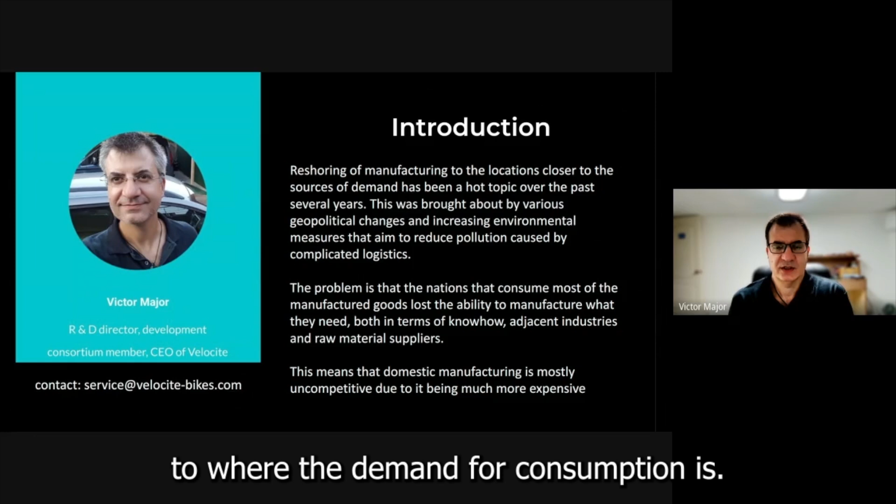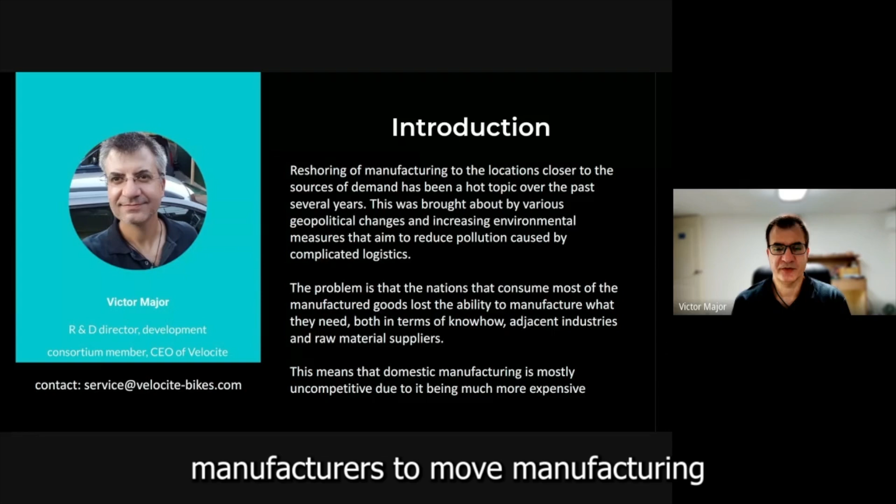I will talk about what's known as reshoring. Reshoring means moving production back to where the demand for consumption is. Offshore production became a popular solution to increase profitability by brand owners because of labor costs that were rising as the prosperity of the local population rose. Changes in geopolitics allowed manufacturers to move manufacturing to countries that were less economically developed, and therefore the salaries were lower, ensuring profitability or sometimes even survival of manufacturing companies.

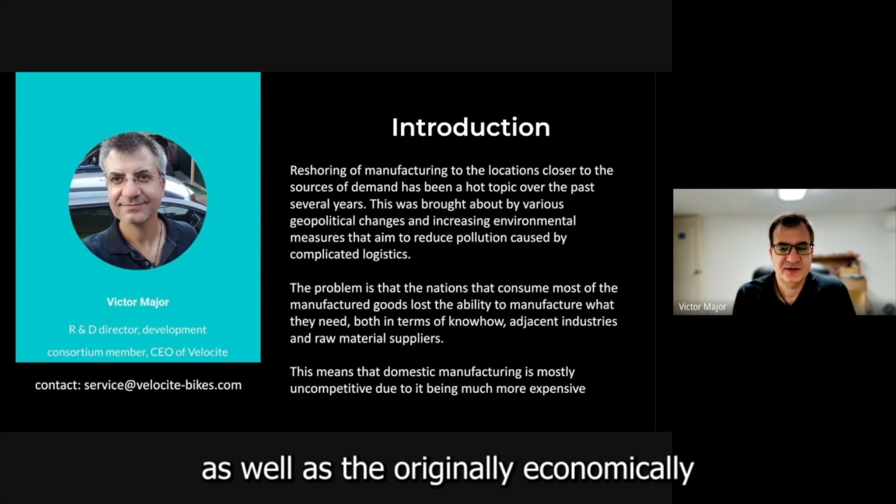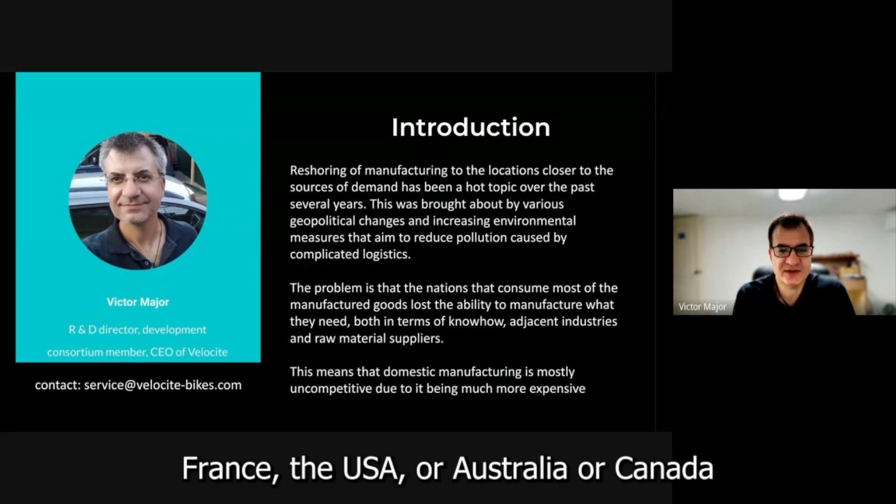However, due to changes in geopolitics, as well as the originally economically underdeveloped countries becoming more developed and therefore labor costs increasing, brands have increasingly been looking to return manufacturing back home, be it Germany, France, USA, Australia or Canada. Bicycle manufacturers specifically, because that's my specialty, have been trying to move as much manufacturing back to home markets as possible. However, that sounds nice in theory.

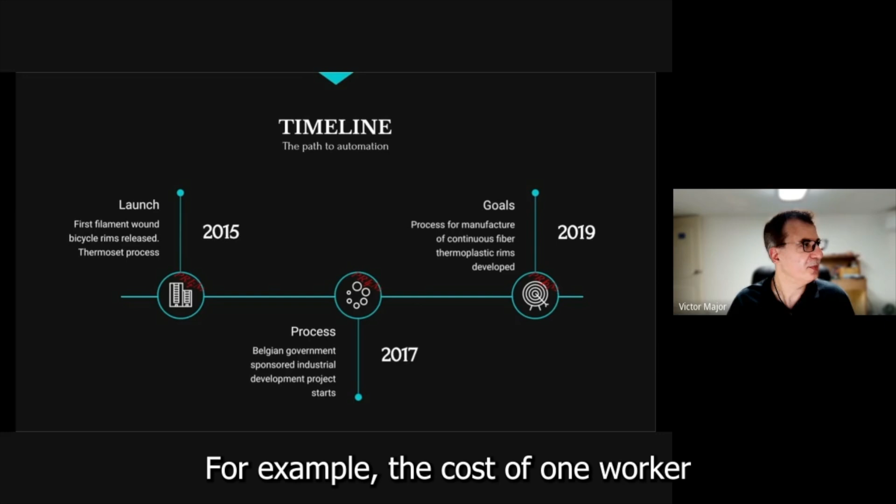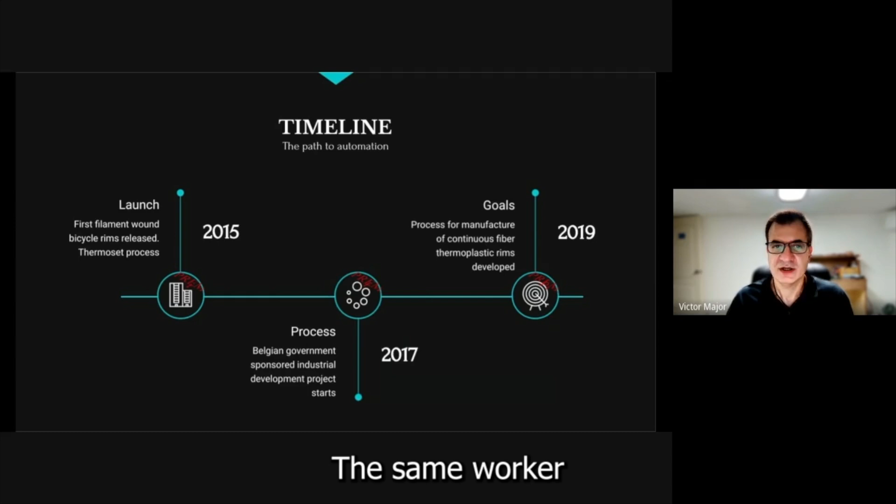In practice, it's proven very difficult. Let me bring up a slide so I can give you exact information. Even though the cost of labor has increased in developing economies, it is still roughly 3 times lower than in developed economies. For example, the cost of one worker per hour in Germany is $26. The same worker we are currently paying in China $7.70. And in one of the cheapest possible places in Europe, if you want to manufacture in Europe, we would have to pay $15 for labor in Czech Republic, roughly double the cost compared to China.

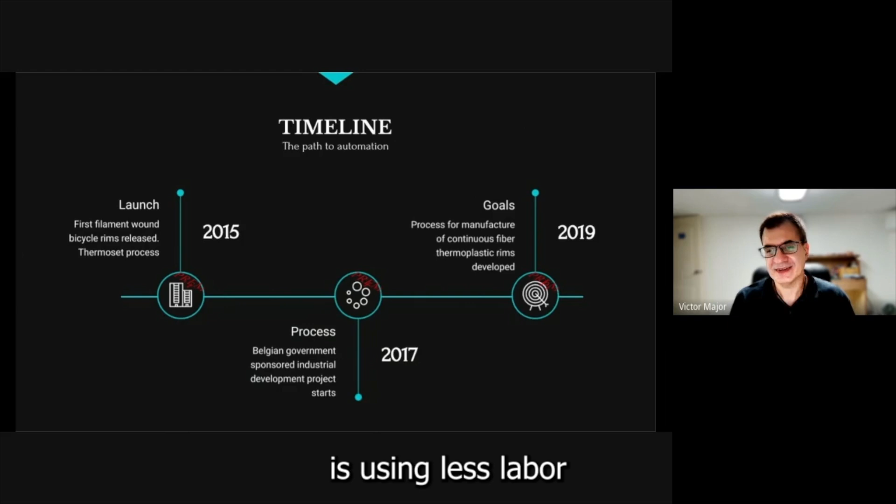So even though the desire is there to move manufacturing back home, so to say, there is still huge difficulty in making a financial equation that works. So what we've been focusing on is using less labor for manufacturing and moving towards automation.

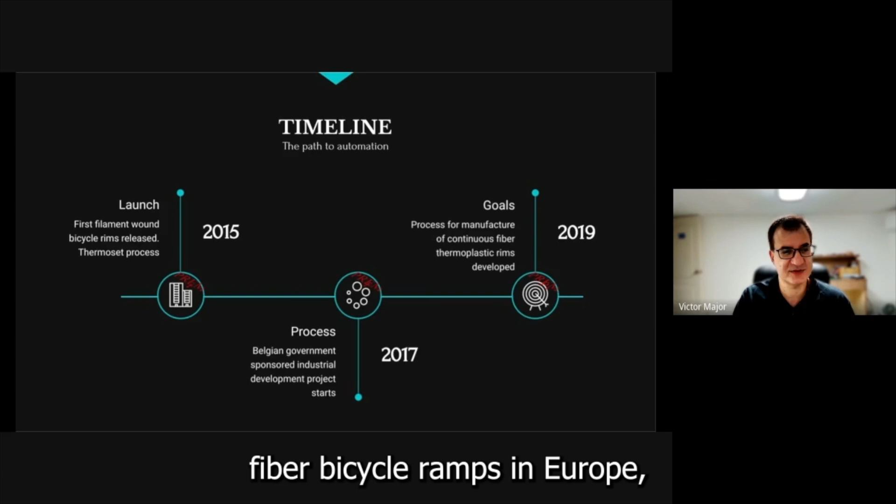However, even with automation, there are no processes that exist, so everything that we need to do has to be invented. In our case, we have a research project that we started in 2015 using machine-managed processes to make carbon fiber bicycle rims. We had a research project funded by the European government to develop a process that can be successfully implemented in Europe, which we concluded in 2019. So even though we have a process that may work and make carbon fiber bicycle rims in Europe, we cannot commence this project because of a lack of know-how.

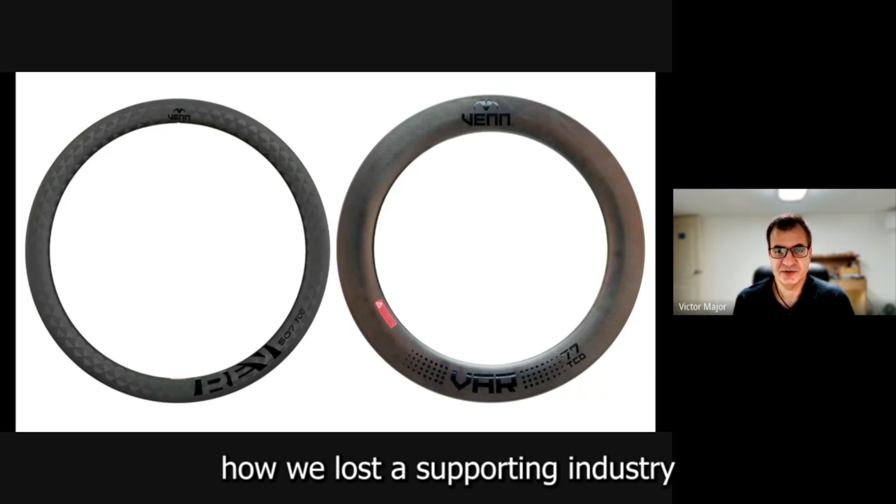Along with moving out production, what happened to domestic manufacturing is we lost the knowledge of how to make things. We lost the supporting industry that makes tools. We lost trained labor - they retired or died. In Europe, we have no people that can make bicycle rims, even with help of machines. So the process of reshoring manufacturing is far more difficult and goes beyond the simple costs of setting up business.

I'm showing you a photo of two machine-made rims we've been making for a few years. These are not made by hand, which is the norm. They're made using what's called a filament winding process, which uses less labor. But even this can't be done in Europe because, as I said, we lack the workers and the supply chain.

So in order to successfully move manufacturing back to Europe, we have to reduce handling costs and handling steps. We have to control the quality, and if our supply chain is weak, controlling input quality is difficult because we have no choice of suppliers. And we need to reduce the cycle time.

The big problem with the current supply chain of bicycle parts is that they're mostly all made in China and mostly all consumed in Europe and the USA. So the lead time is roughly 12 months at best, meaning a brand owner may order a particular design, and 12 months later it may arrive and be available on shelves in bicycle shops in the USA. The advantage of reshoring is that lead time may be cut down to 30 days, for example. That's one good argument for reshoring.

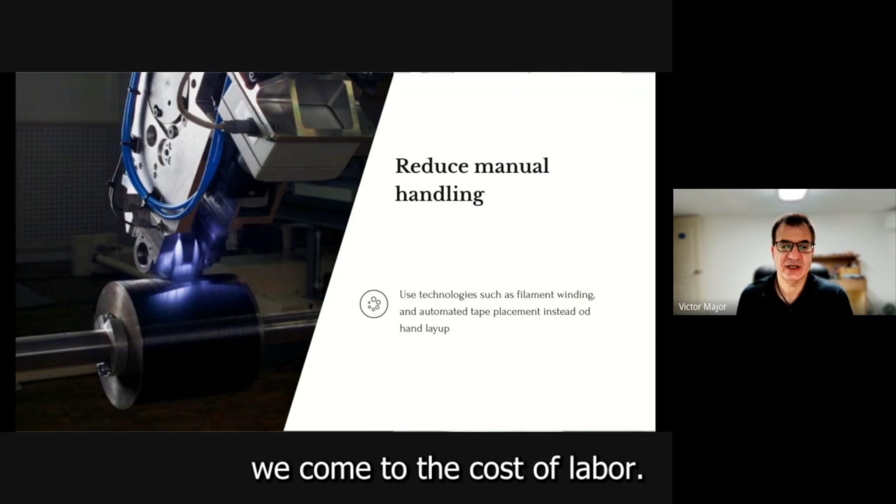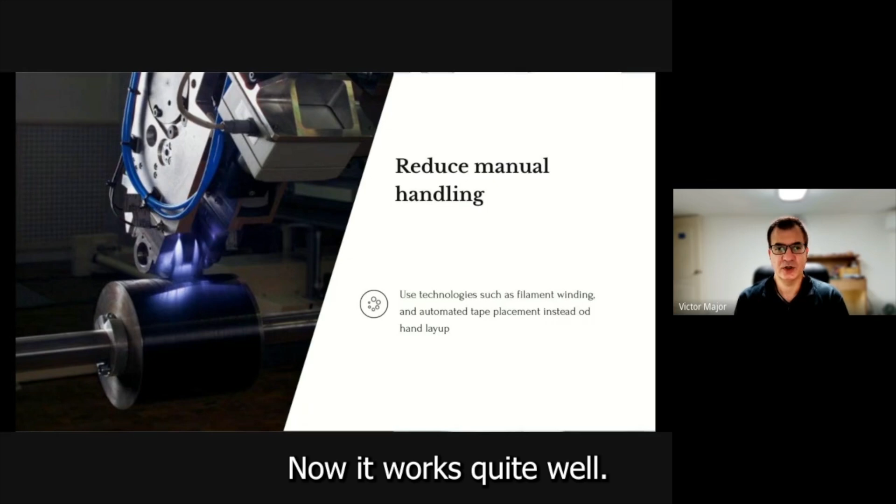But again we come to the cost of labor. The only way to reduce labor cost is by reducing the number of workers. The problem isn't that it's not possible—automation is available, we have designs for machines that can do this, and there are even humanoid robots now that work quite well. BMW has them deployed in their German factory.

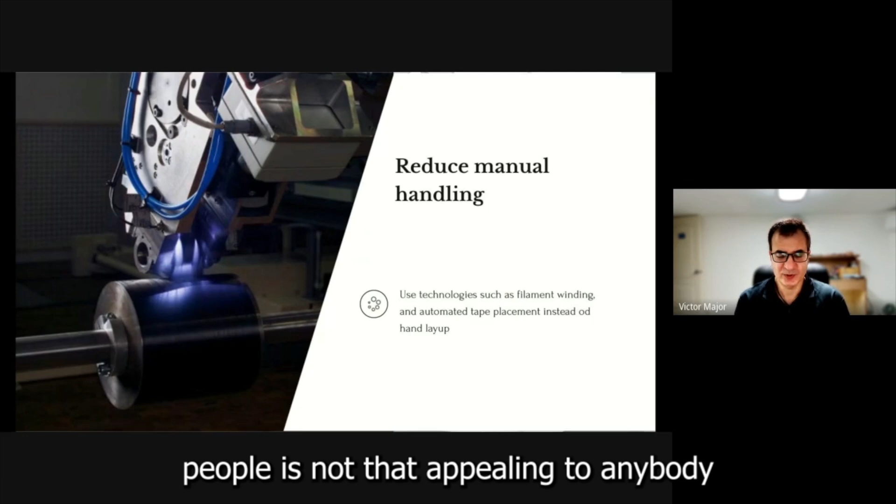The problem is the cost. Most governments in developed nations are worried about unemployment, and they're not going to subsidize you setting up a new factory that doesn't employ people. So a process that doesn't employ people isn't appealing to anybody in government or even banks, because they work hand in hand with governments. Getting finance to set up a factory is another big challenge we haven't been able to overcome. Governments both want us to set up and don't want us to set up unless we employ people, and we can't employ people because we can't pay for them.

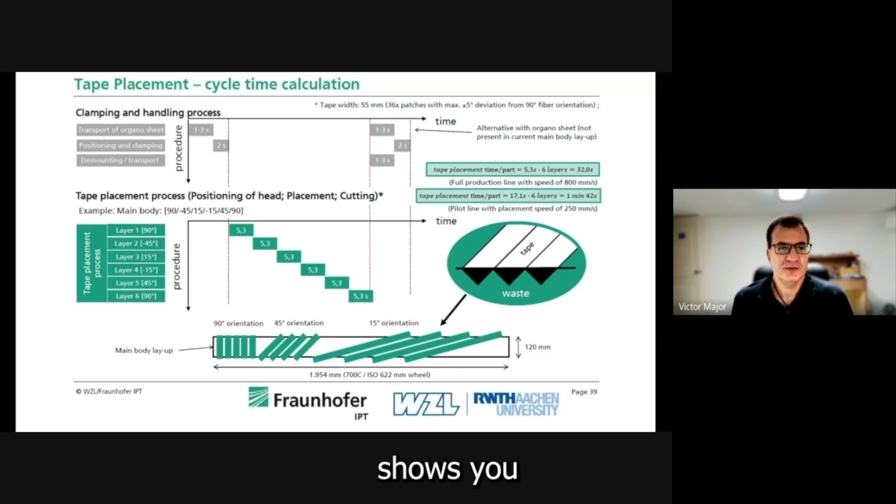This slide shows one of the processes we developed with the Fraunhofer Institute in Germany, the WZL Institute in Aachen, and the University of Technology in Aachen, while our company was set up in Belgium. This was financed by the EU government and the government of Flanders in Belgium.

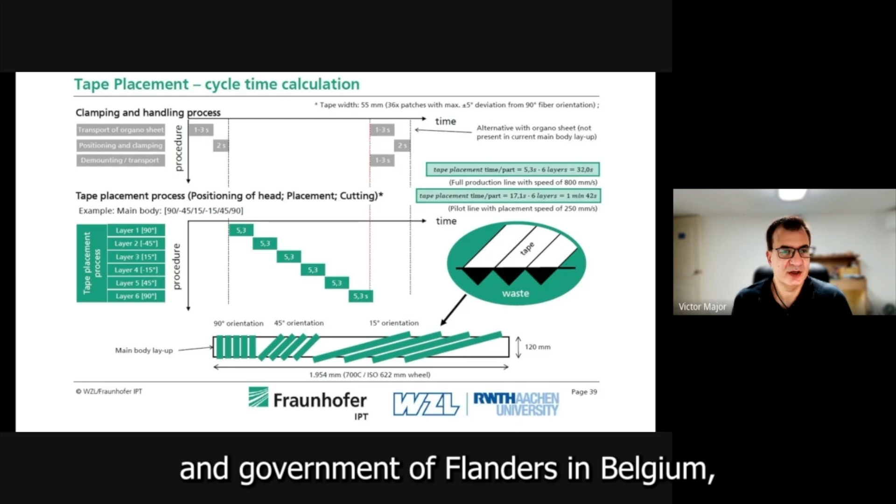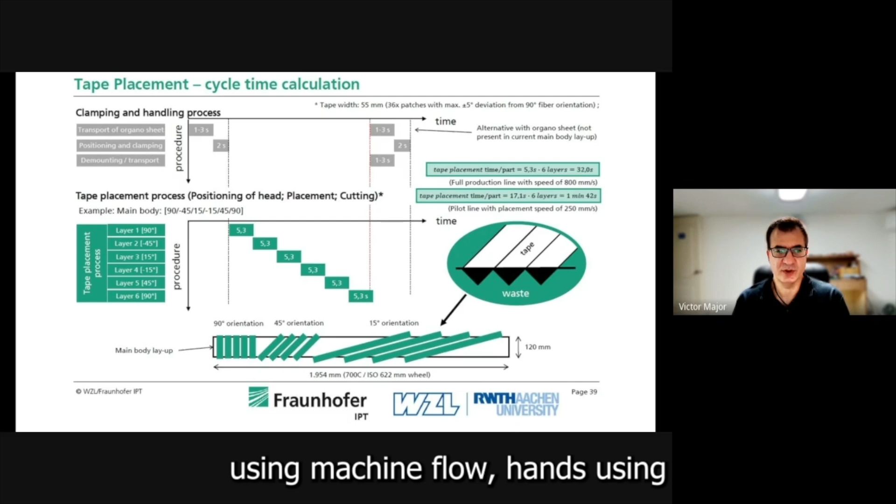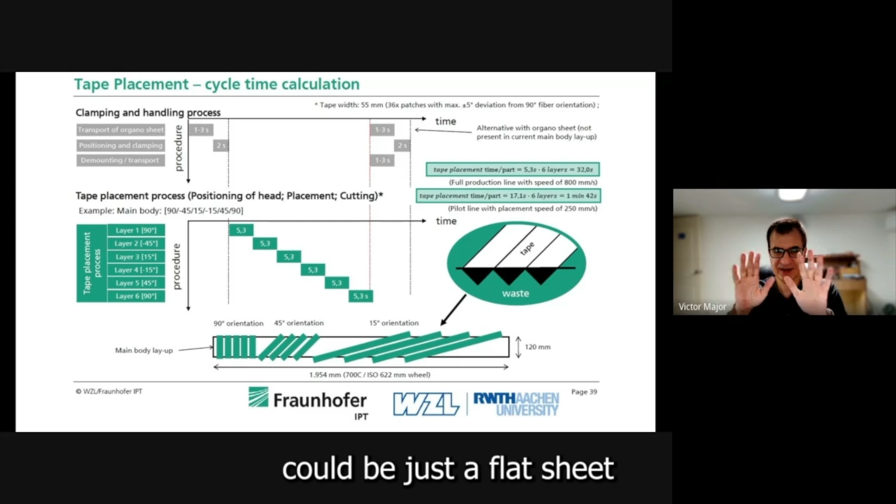It shows a way to make a bicycle rim using machine layup, no hands, using what's called thermoplastic carbon fiber—meaning the material holding the fibers in place is a plastic rather than a thermoset material, which is what's commonly used now. The difference with thermoplastic is you can create a shape you like, even just a flat sheet, and lay it down. You can store flat sheets of thermoplastic and they're quite happy to lie flat. When you need it to become a rim, you just reheat it and shape it. That's not possible with the thermoset process.

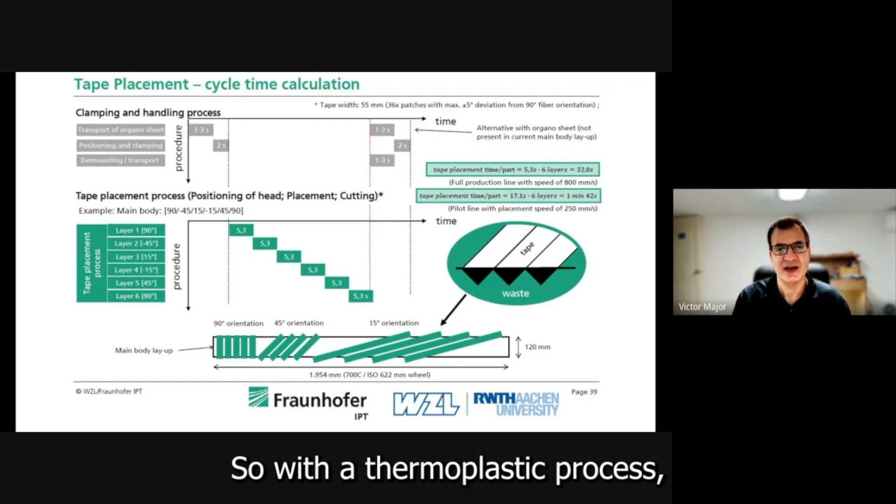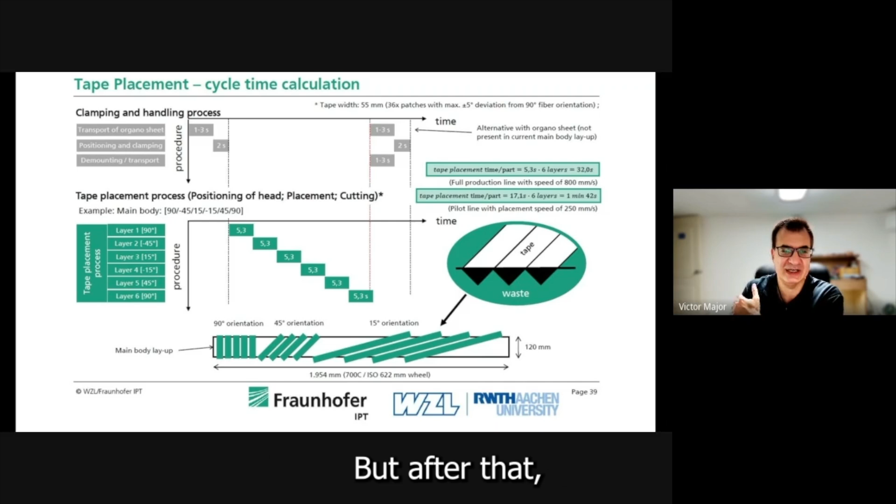With the thermoplastic process, we can make a bicycle rim every 5 minutes, much faster than traditional rim making, which takes 1.5 days per rim due to curing and geometric stability time. Rims need to be baked for about 1.5 hours, but after that you still need to cook them for a day just to make sure they're completely cured. Whereas with thermoplastics, we can achieve all that in 5 minutes.

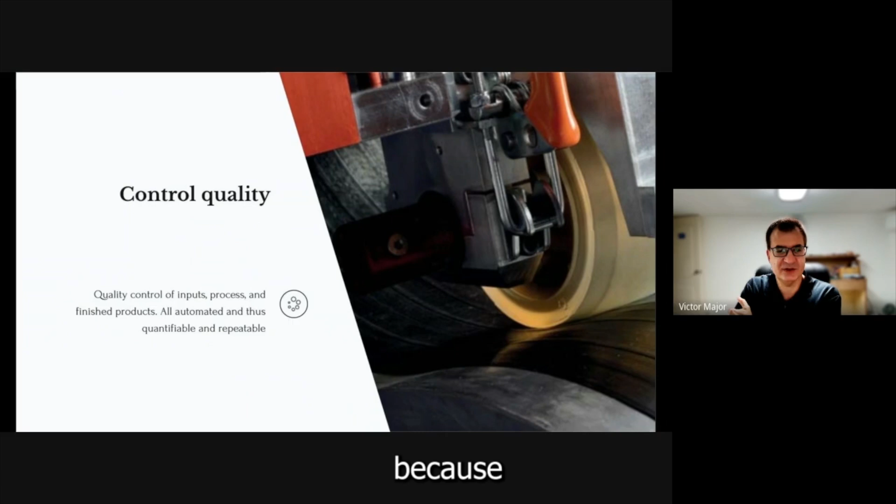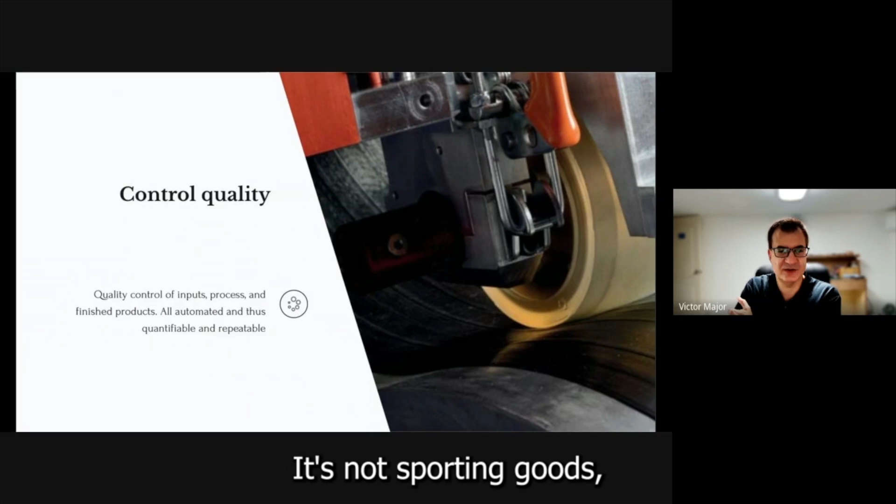I'll talk briefly about quality control on the inputs. We can automate all that, but as I mentioned, getting the supply of materials is difficult because the supply chain in Europe—specifically, since I'm more familiar with Europe—is geared towards automotive and aerospace industries, not sporting goods, which is where we belong. So the types of materials available to us are not suitable.

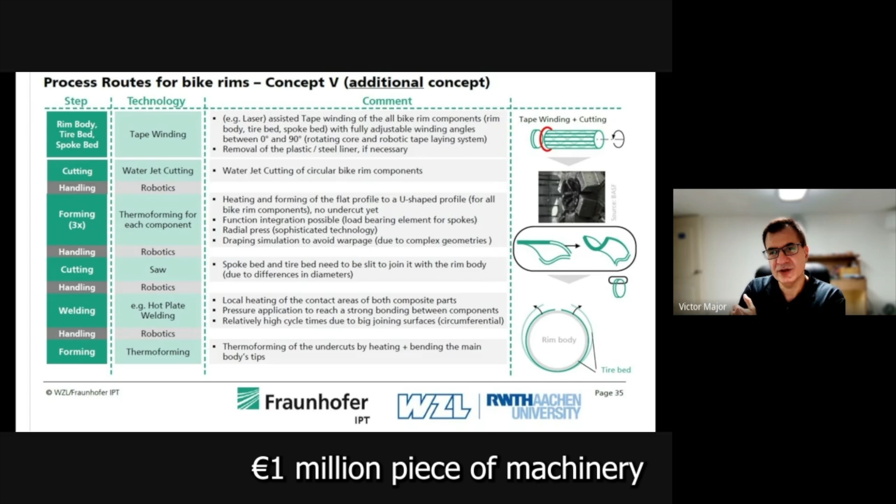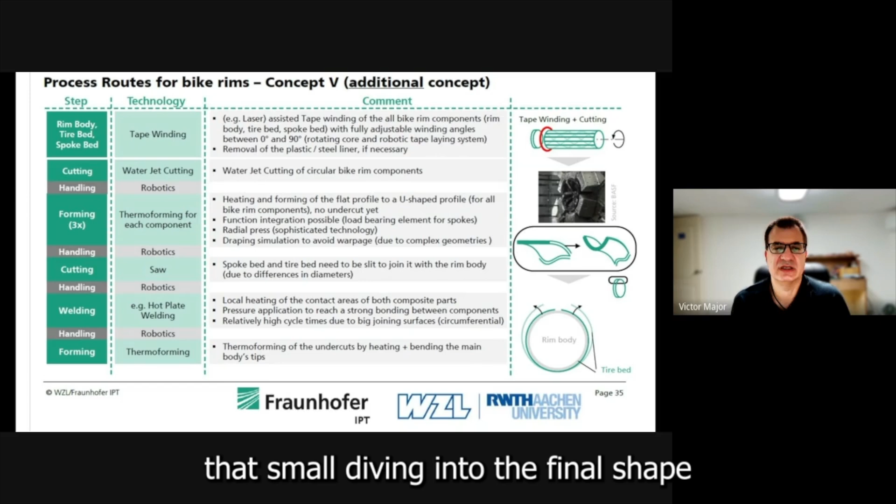This roughly shows how to make a bicycle rim using full automation. This part here is very small, but it's a 1 million euro piece of machinery—you can't see my cursor on screen so I can't point to exactly what I mean. There's a bit of machinery here that molds the rim into its final shape, which is horrendously expensive. Nobody in the bicycle industry has a 1 million euro mold.

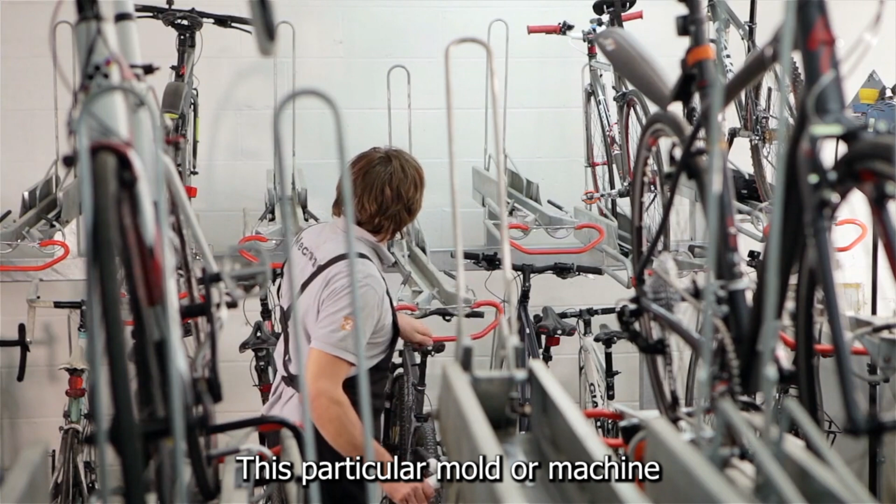Our current mold set costs around $7,000 or 6,500 euros. This particular mold or machine that would set the rim is 1 million euros. That is just not a kind of money that the bicycle industry can support. So there is a slight financial problem with our process.

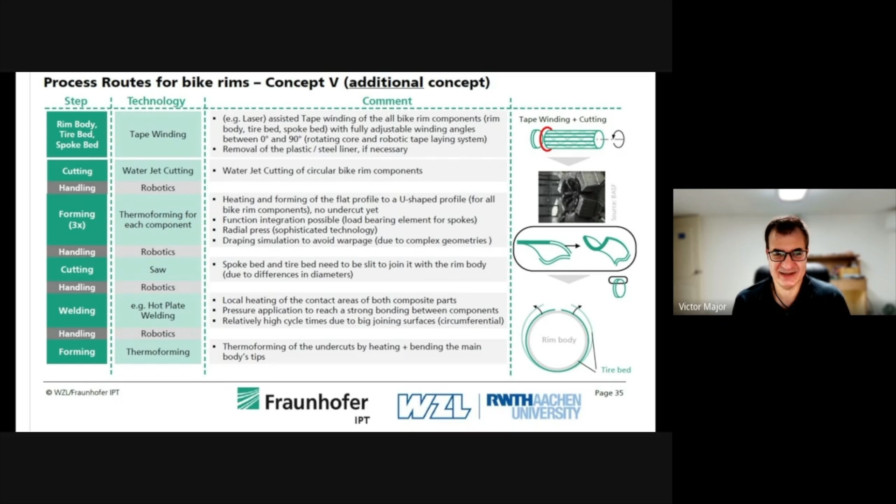Otherwise, we have a system to make carbon fiber composite rims in Europe, USA, Taiwan, or anywhere at all, even in someone's shop, because it does not emit any gases. It is quite silent. However, the cost of setup is quite high.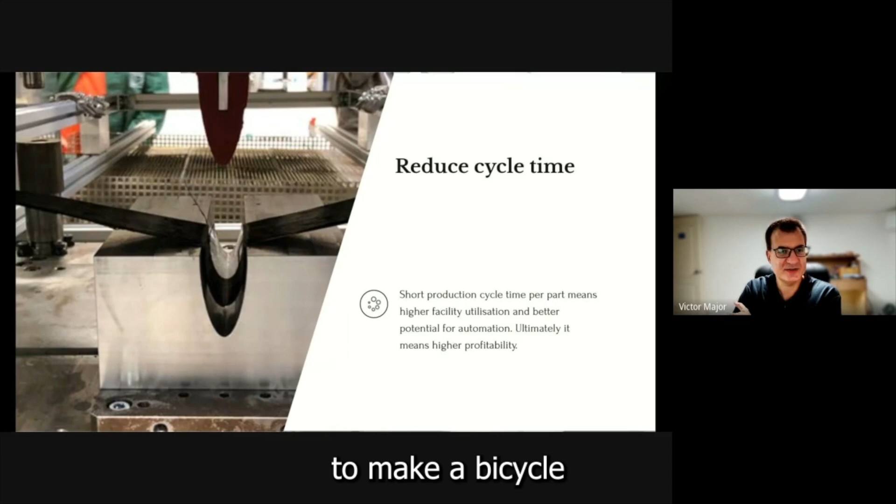As I mentioned, the cycle times currently take 1.5 days to make a carbon fiber bicycle rim. But for us, with our method, it takes 3 minutes, which is a significant improvement.

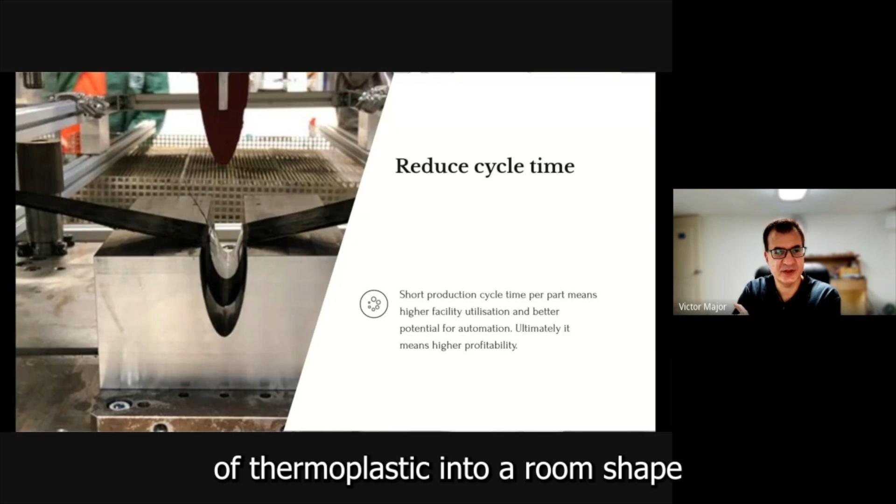This picture just shows one of our prototype tools and prototype molds at the Fraunhofer Institute. We were shaping a flat piece of thermoplastic into a rim shape, just using heat and pressure.

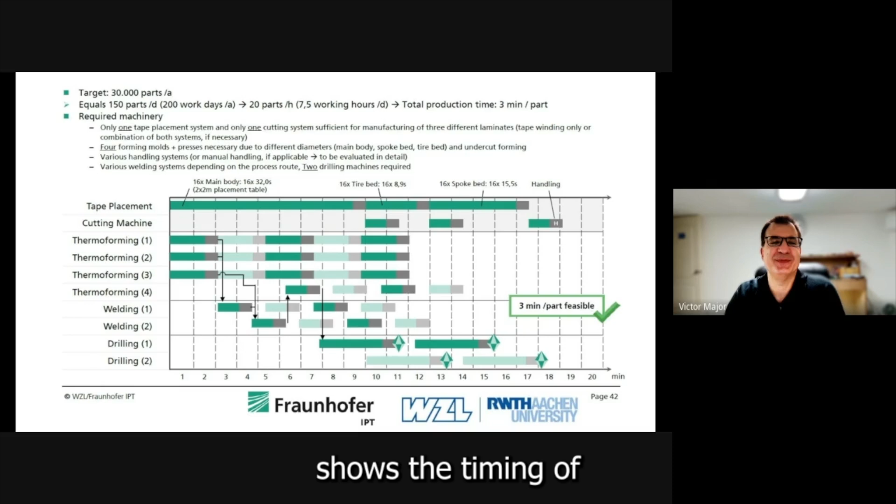This, another very complicated slide, shows the timing and steps involved in making a rim. I think you can see my cursor now. So we would start with placing the tapes using a robot. No touching, this is all machine made.

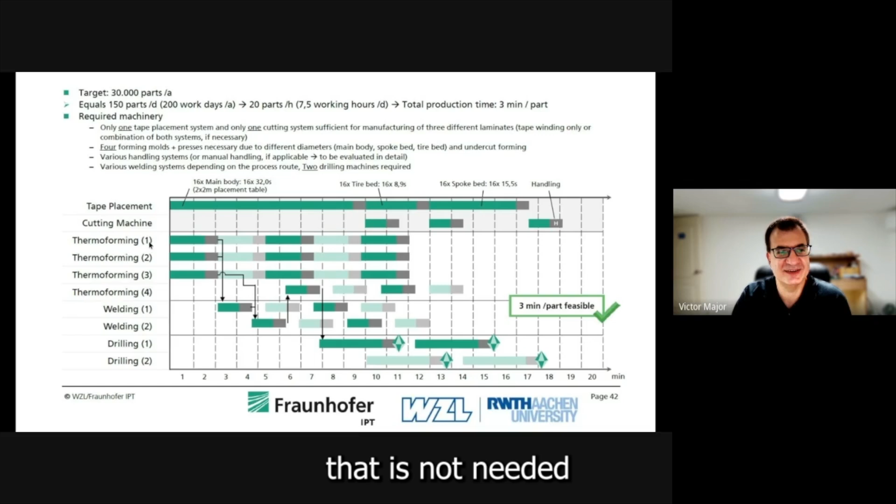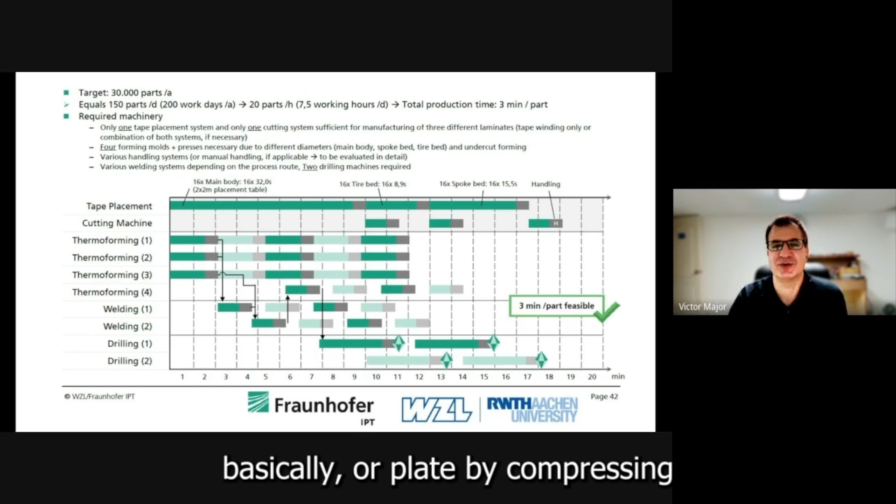Then a cutting machine would cut the excess tape that is not needed. Then we would have thermoforming, which means making a blank shape, basically a plate, by compressing all the different layers together using pressure and heat.

Then we would weld separate parts together, because one other thing with thermoplastic is you can thermally or ultrasonically weld them. You don't need glue. You can make them stick to each other without gluing or co-molding.

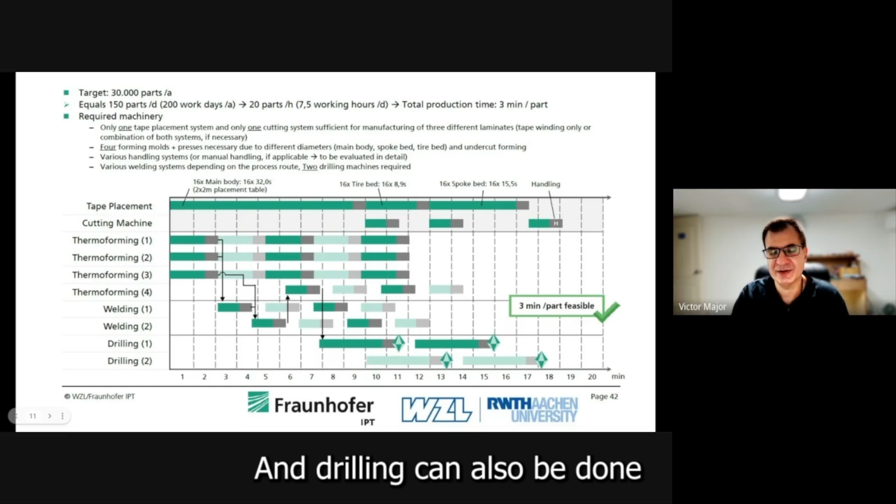And then drilling, of course, and drilling can also be done without damaging the fiber, just by pressing a hot needle under pressure, and the fibers just move away, so without breaking.

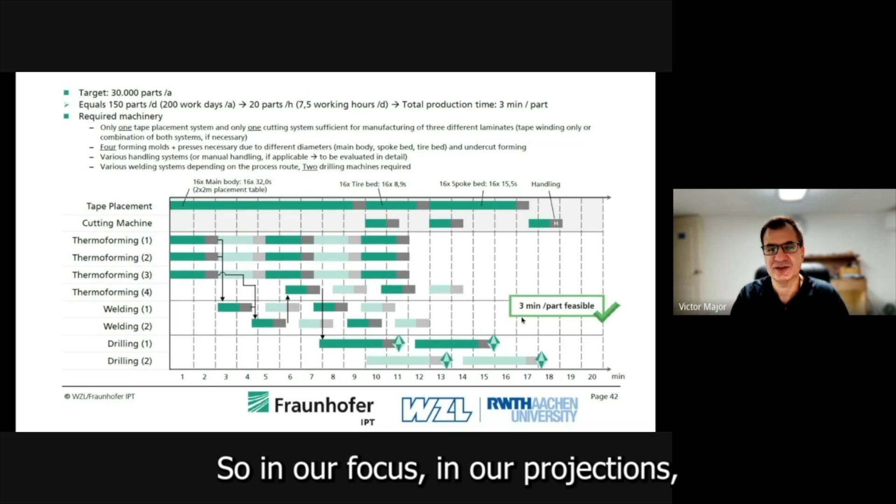So in our projections, we could actually make one rim in 3 minutes, which is extraordinary but doable using our process.

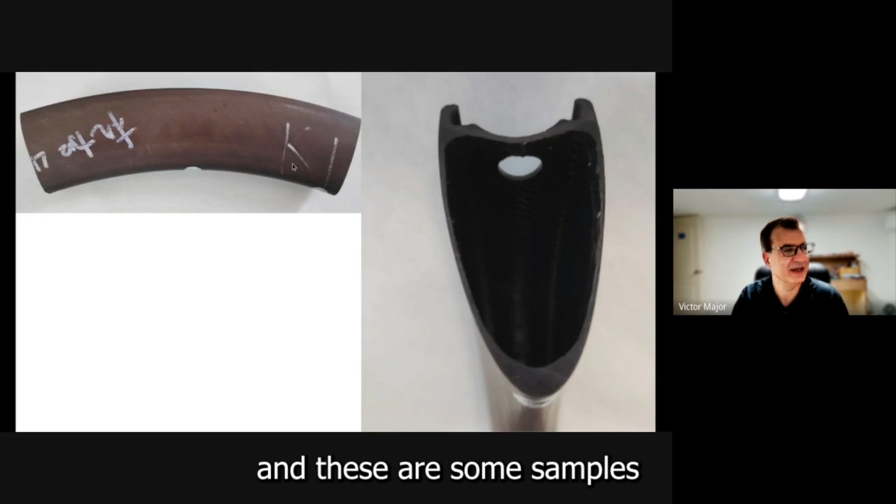And this could work for reshoring implementation. However, the initial setup costs are quite high. And these are some samples from our prototype manufacturing.

You can see the machine laid up tapes, and you can see the insides. Our wall thickness is quite uniform. The entire thing worked quite well and is feasible.

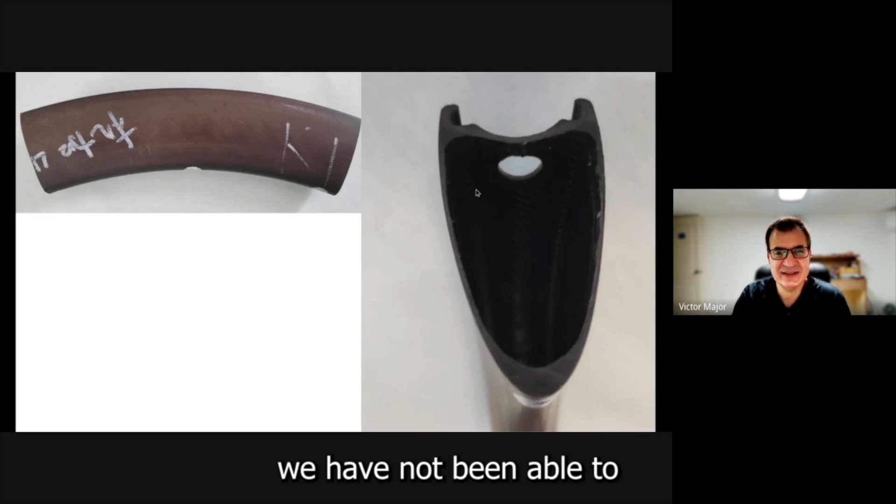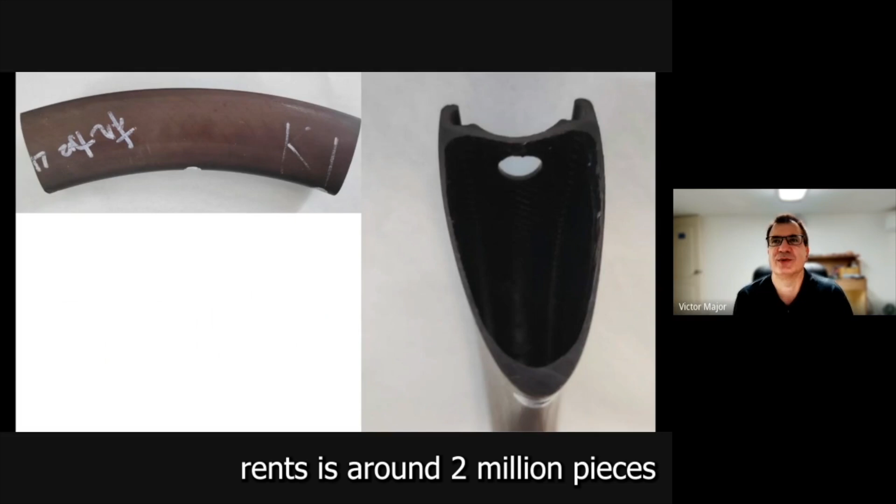But as I said, since 2019, we have not been able to set this up in Europe, even though it is feasible and it works and it is in demand. European demand for carbon rims is around 2 million pieces per year. So we're not talking about a small market, we're talking about a significant amount of money.

I think I can stop here. If anyone has any questions, please feel free to ask me.

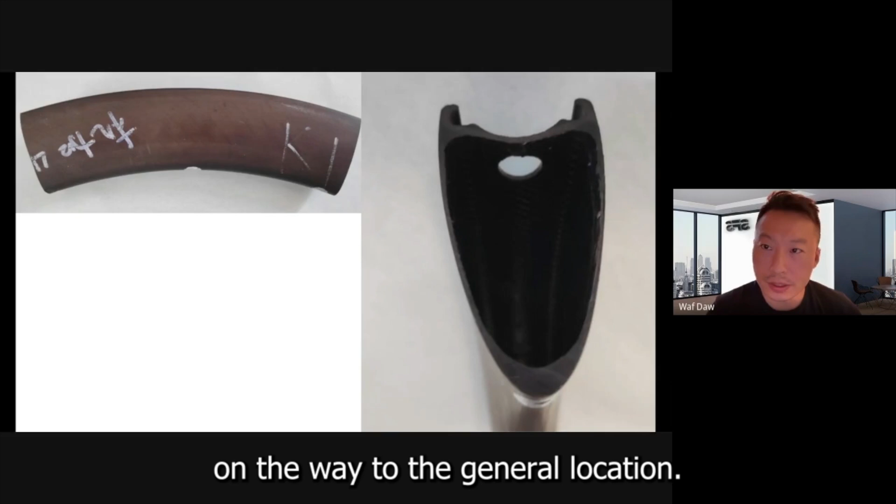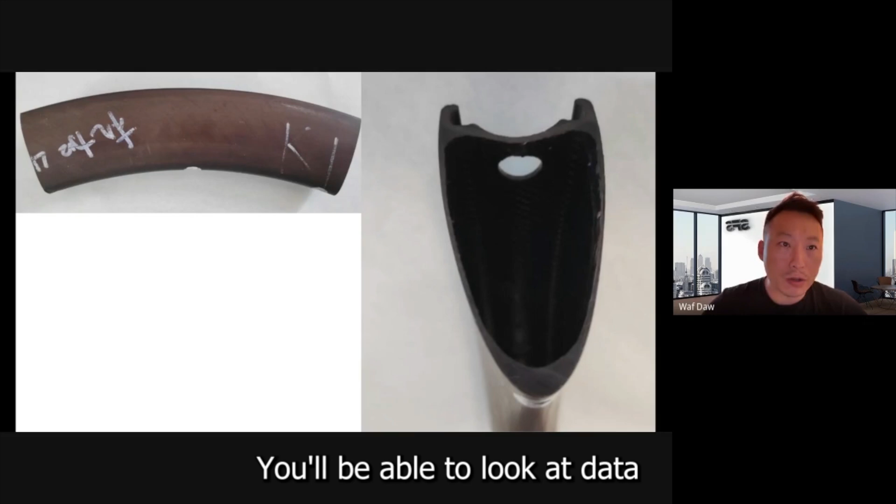If there's no questions, I'll just do a quick summary of your presentation, Victor. You want to go first, Tim? You can translate it as well. I think it's good, but I just have a question for later, maybe after you finish.

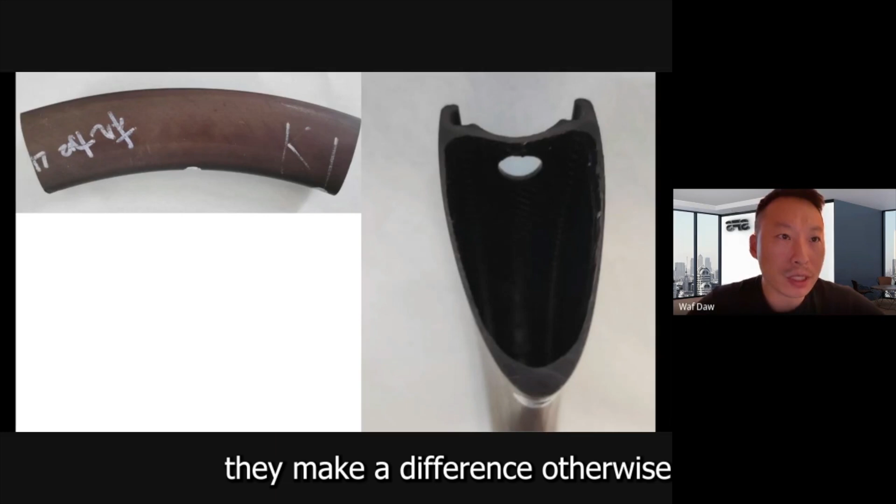You wanted to ask anything? One question, because I was at the 3D printing exhibition last week, and I saw a lot of companies working on recycled materials for fibers, recycled fibers. So would that be a possibility with this process, Victor, to use recycled materials?

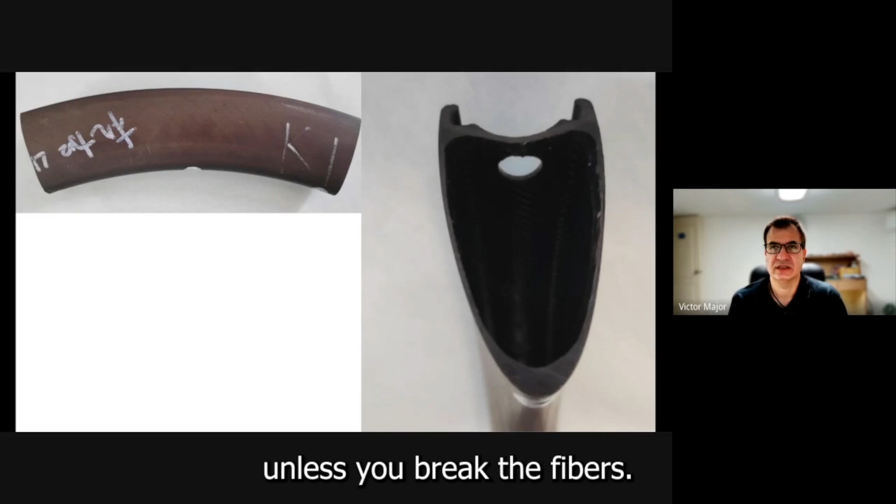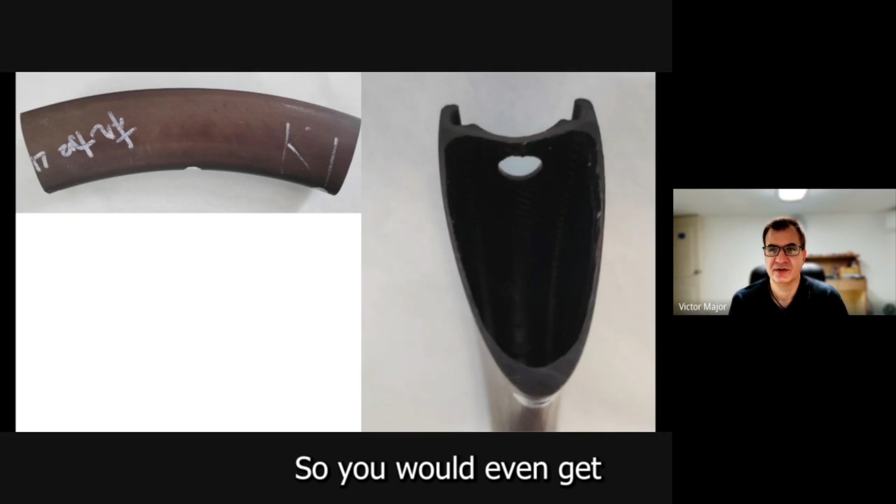Yes, because you can reform thermoplastic. Unless you break the fibers, some of the plastic matrices are infinitely reformable just by applying heat and pressure. So you would even get structurally sound objects just by reshaping it.

It's not even recycling, it's reuse, remodeling. Yeah, it's reusing. I think it's mostly reusing the waste that comes from car manufacturing. They have a lot of waste sometimes, or from other types of manufacturing, they have the waste. You reuse that to make bicycle rims. So maybe that would boost some interest into this process, maybe.

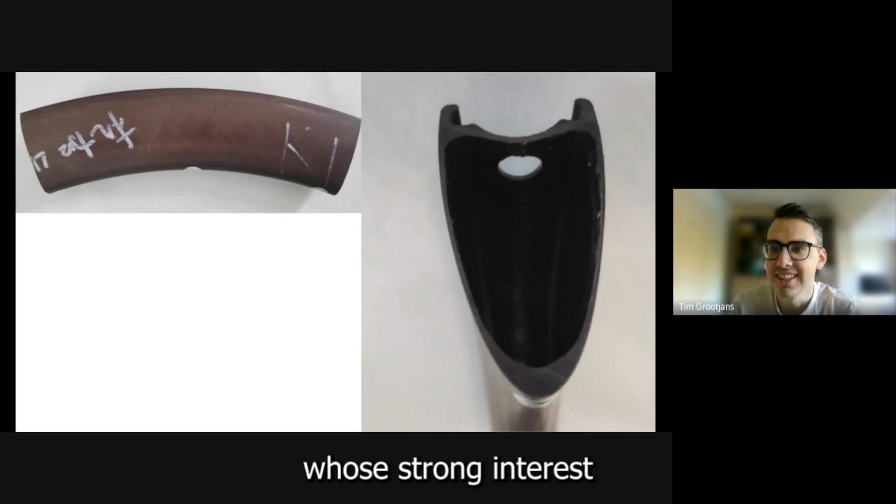No, our process requires new fiber. I know what you mean. Okay, I know what you mean.

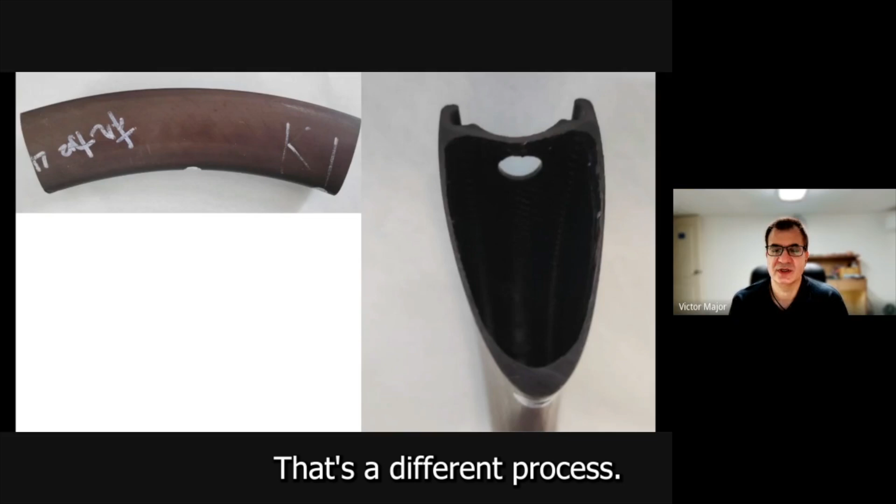That's a different process. They call it forged carbon fiber, where you use carbon fiber waste and add new resin, and you use compression molding to get new shapes out of it. You cannot make rims out of that.

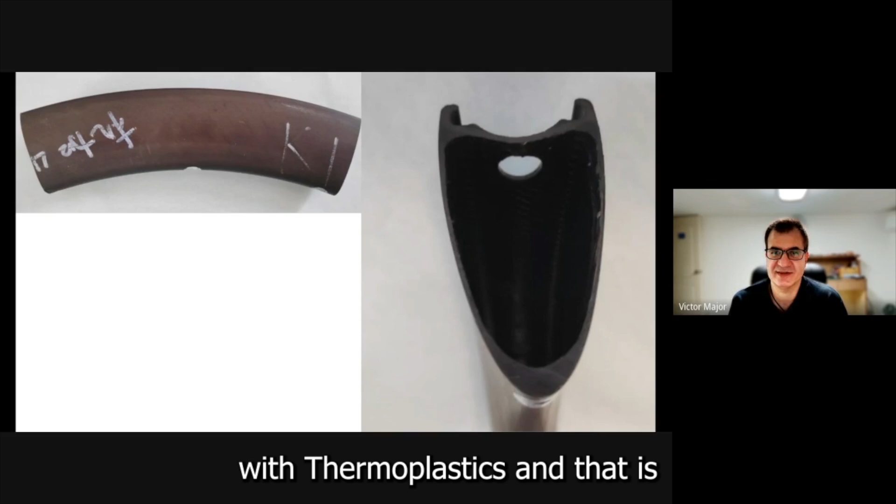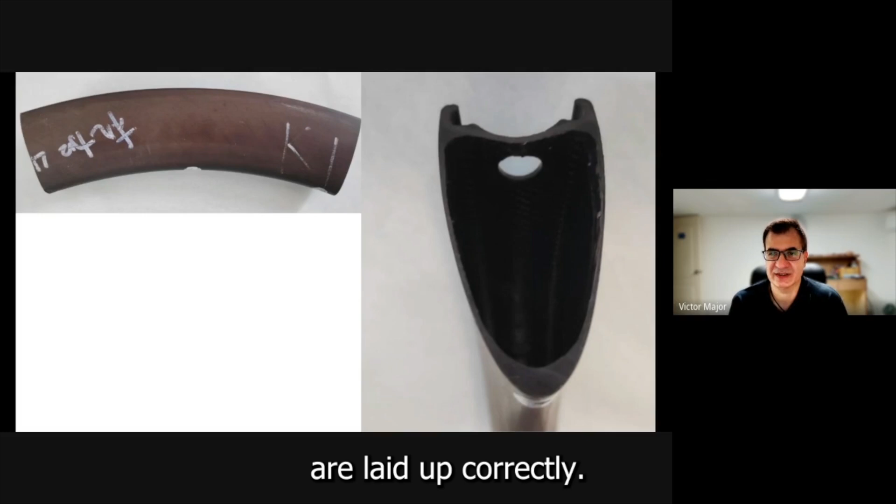They would not be strong enough because there's one problem with thermoplastics, and that is creep. If thermoplastic is under constant strain, it will change shape unless your fibers are laid up correctly. So you cannot use chopped fiber and make, let's say, bicycle rims or even bicycle frames that are under constant load, because they will change shape over time.

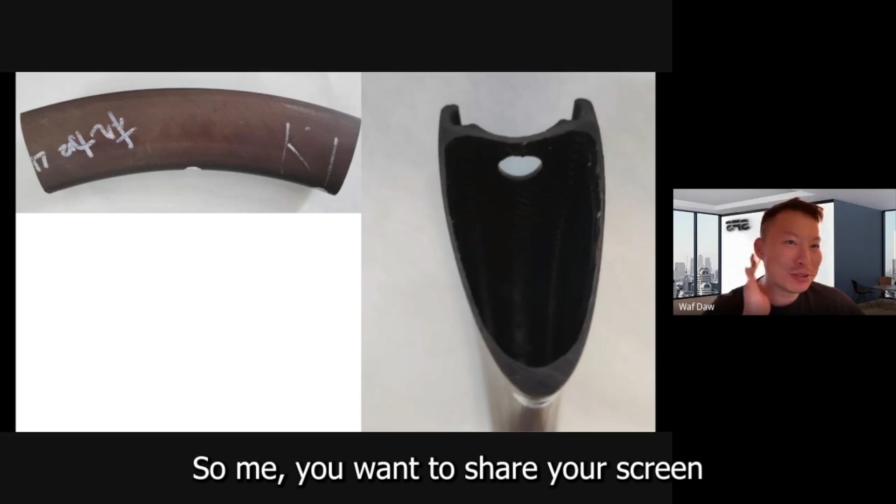So I'm a bicycle designer, and I really like looking at the industry to see where it's going and what we can anticipate in the future. So I'm sharing today a few topics about that. The main thing I think is really interesting for this industry is that we all see cities getting more and more traffic with cars and more congestion. I live in a very rural area in the Netherlands, and even here at 8 in the morning and 5 in the evening, it's full traffic every weekday. So this is one really big part where I see bicycles can help.

People are also evolving their lifestyle, so they are more and more caring about being healthy. So this is something we can also use. And the last one is that, in the Netherlands but also in Germany, the e-bike market continues to rise. I think this year more than 56% of all bikes sold are electric bicycles. So this is really good to keep in mind when you produce bicycles.

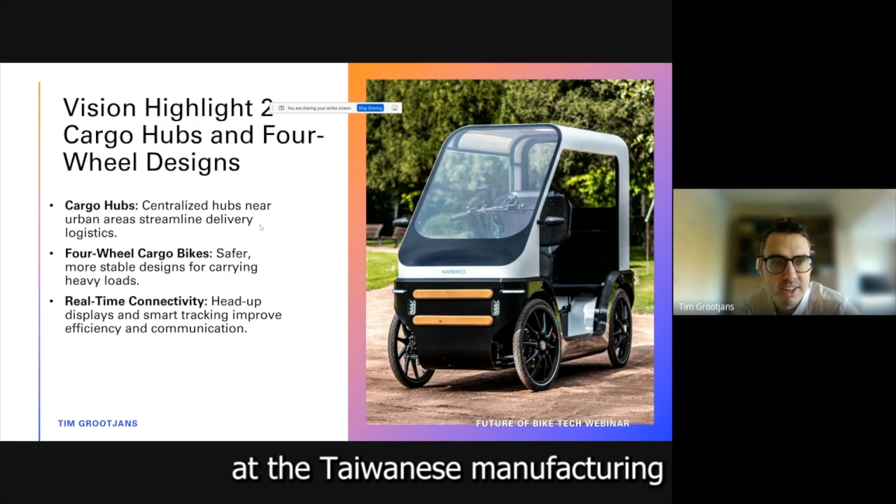The second one is also really important, because in Europe we have more and more cities who want to be fuel-free in a few years - some by 2027, some a little later. That means there will be no fuel vehicles like scooters. We have a lot of fuel scooters still here, so they will be banned and replaced by electric scooters. So if you are producing electric scooters as a Taiwanese or Chinese manufacturer, I think this is a real big opportunity to bring those electric scooters to Europe as well.

I had one when I was living in Shanghai, and I think they are great, but here we haven't really used them - we only use cars and bicycles. So that is something that will be coming quite big.

But also the delivery of packages, like I was just talking about, but also not only delivery - also workers who come to help fix your house or your water, they're also not allowed to drive into the city with their vans anymore. So either they have to buy an electric van, or they have to park their van outside the city and find a way to come inside. This sounds a little bit crazy, but this is something they're really talking about - cities not allowing any fuel vehicles inside anymore. This will be quite a big change.

And the C1 - I really like this concept of the car bike. In this case it's more like a tuk-tuk, so you can take 2 persons behind you. But I see most potential actually in the cargo version of this.

That means you can take heavier loads with you because you have four wheels and you're protected from the elements with the roof cover. I see a lot more vehicles like this coming out recently, and I think this will keep coming into the future as well.

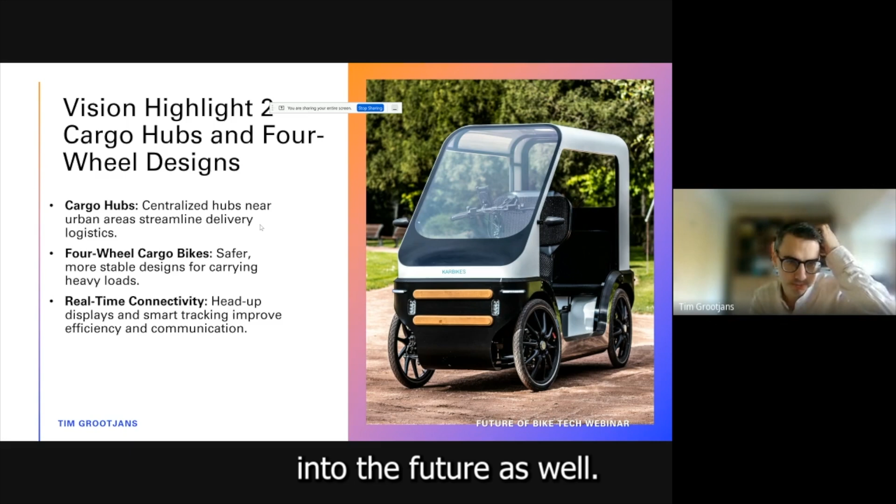But also with this solution, there would be a lot of need for different infrastructure. You'd need to power or replace your hydrogen cartridge with a new one. And also there has to be a lot of innovation done on the compactness of the hydrogen. So maybe this isn't the solution, but I'm really interested to see in the future if there will be more solutions coming up.

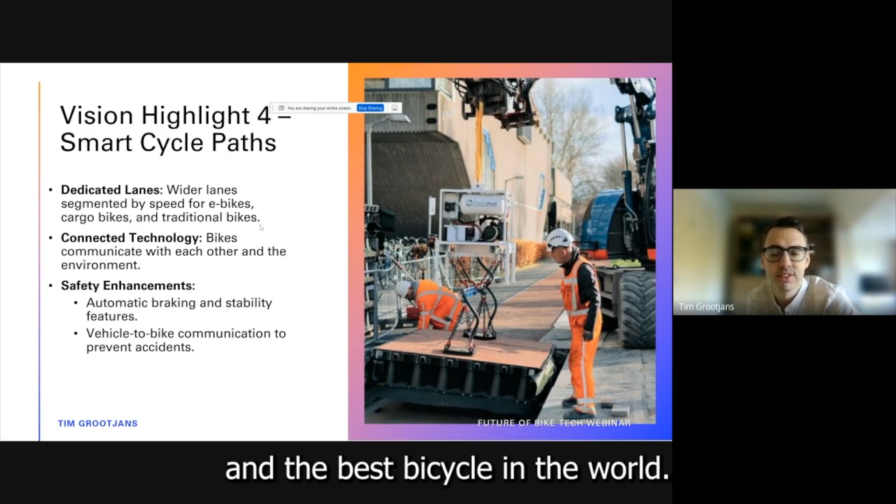This one I'm very interested in as a Dutch person - this project you see on the right has been done in the Netherlands by the university. What I mostly see, and why I want to talk about cycling paths, is because we have a lot of innovation in bicycles, and we can make the best e-bike and the best bicycles in the world. But in a lot of cities, the bike lanes and infrastructure just aren't good enough.

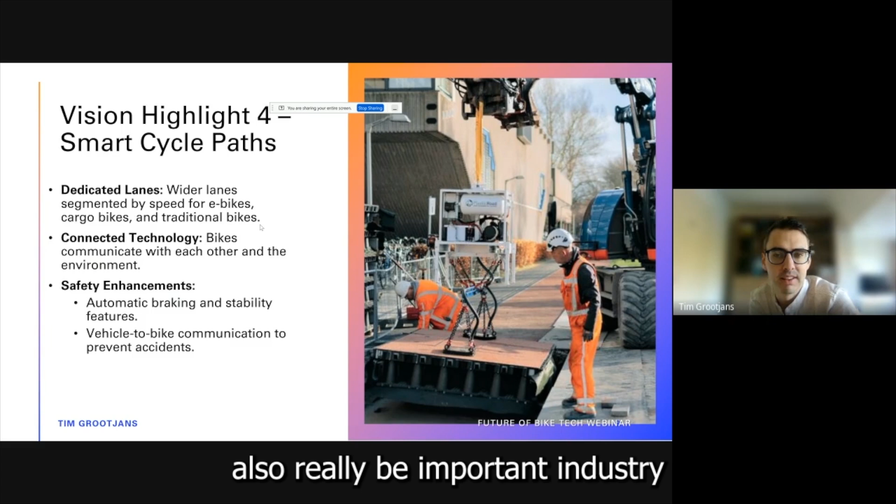This means you can have a really, really good bicycle, but if you don't have good infrastructure, it's still not safe and it's still not nice to ride it. So this is something that would also be really important in the industry. And I think this smart bicycle lane - it doesn't really do that much for your bicycle, but what it mostly does at this moment is gather data on how many cyclists drive there and how fast they go.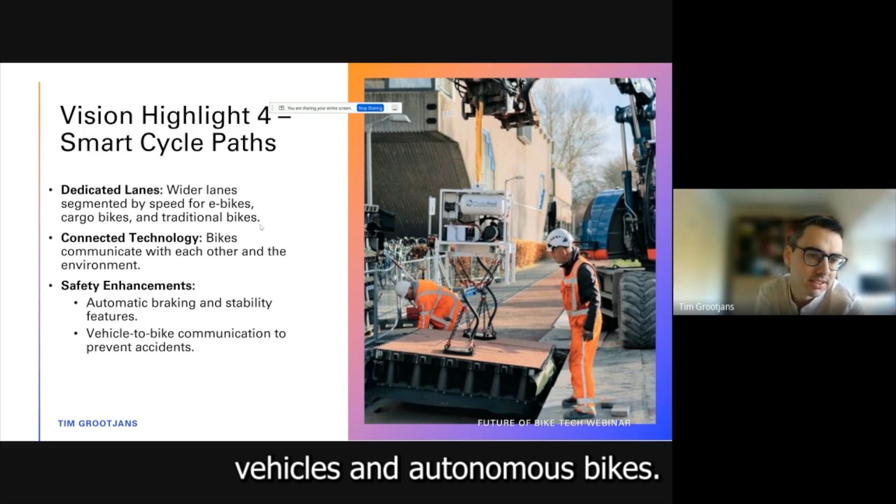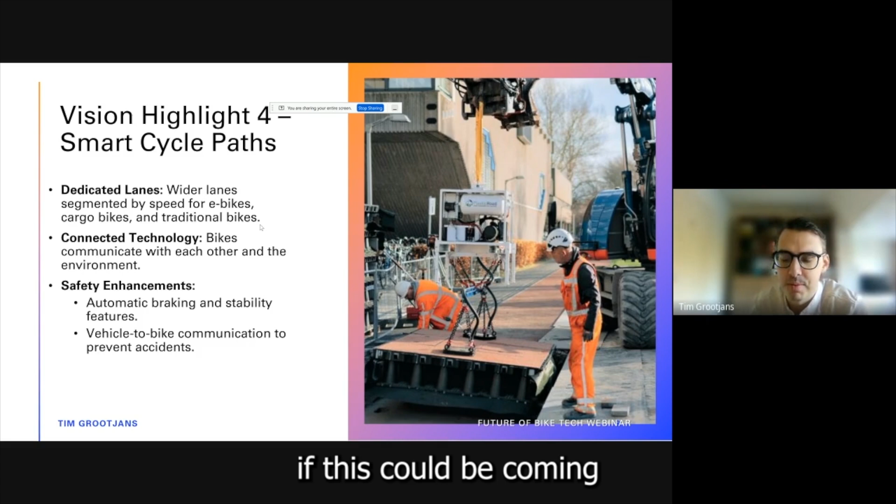At the moment it's more for getting data, but in the future they also plan to use it for autonomous vehicles and autonomous bikes. So you can do a lot more with it and prevent accidents, maybe warn people with cameras. This is something I think would also be really great if it could come from Asia as well. But also just making better bike lanes in some cities in Europe, like London and Paris, where I've recently been - that would be really great.

I also have a video that explains it a little bit better.

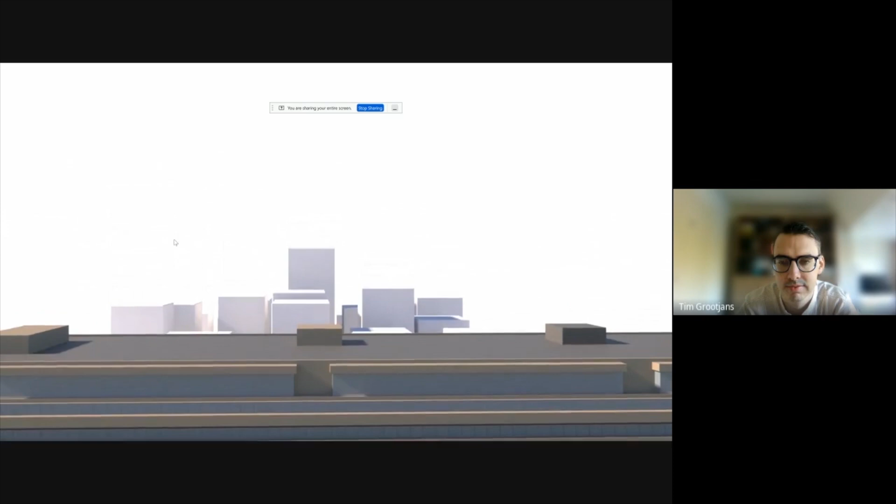I'm not sure if you could hear the sound as well. And the last one, I'm also, especially at the current moment, very excited about.

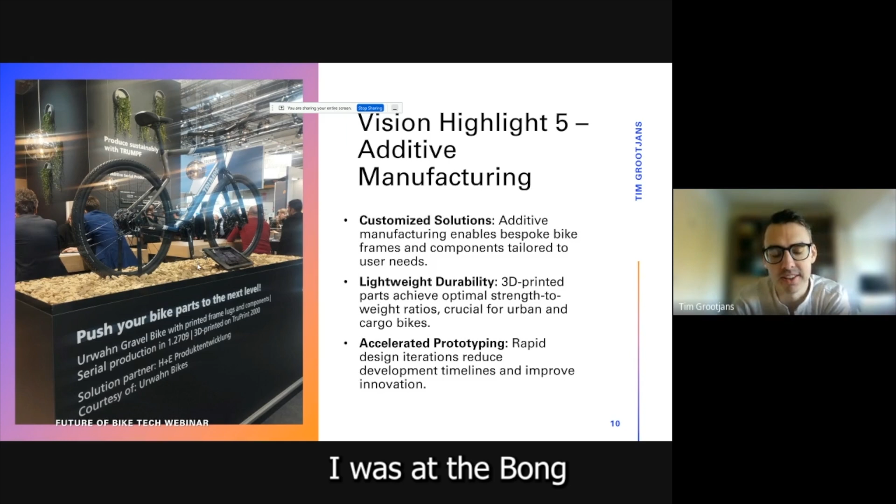Last week I was at the Formnext exhibition in Frankfurt, a 4-day exhibition where all the 3D printing and additive manufacturing companies of the world were there, and it was really great to see. As a bicycle designer, I'm always looking around for where the bicycles are, and there were quite a few of them - I saw at least 5 different bicycles there, so that always catches my eye.

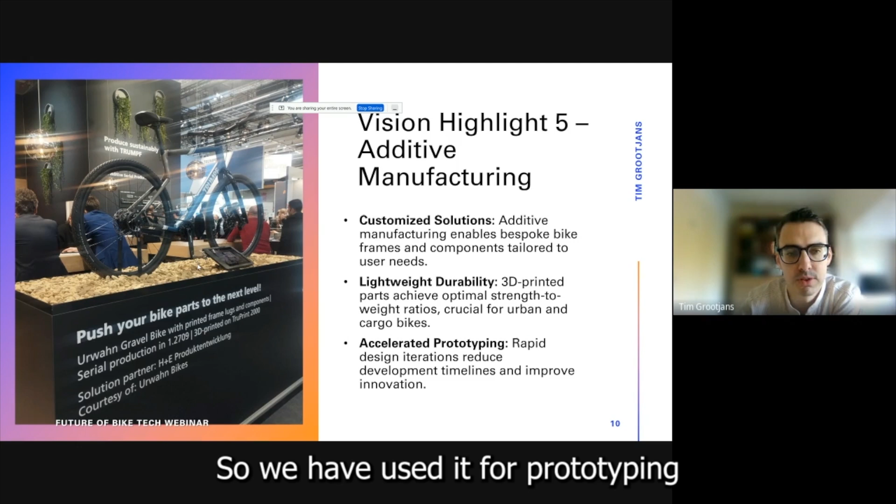I also gave a presentation there about how we have used 3D printing in bicycles so far. We've used it for prototyping, of course, but we've also used it for production, and for really producing parts of the frame, for example.

Not yet for producing the full bicycle frame, but that's something we are working on. What I really like about additive manufacturing is that you can customize the bicycle. So we made a bicycle where part of the frame, which was a non-bearing, non-structural part, was 3D printed on each bike.

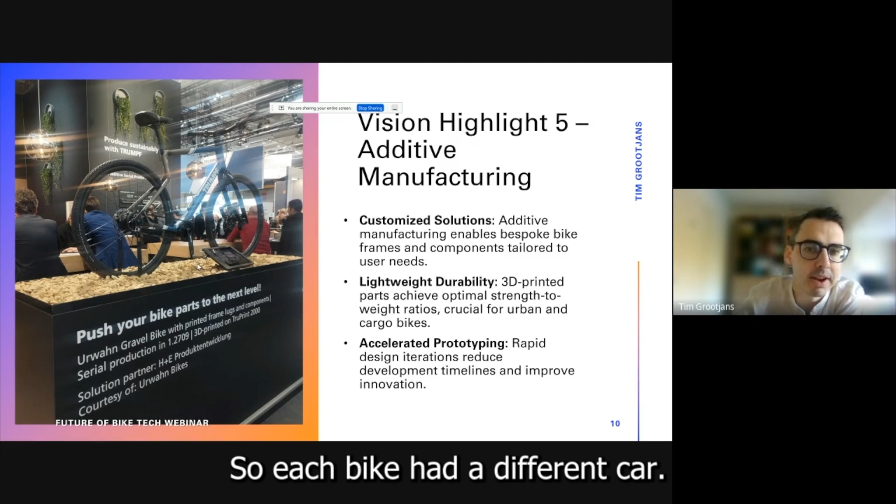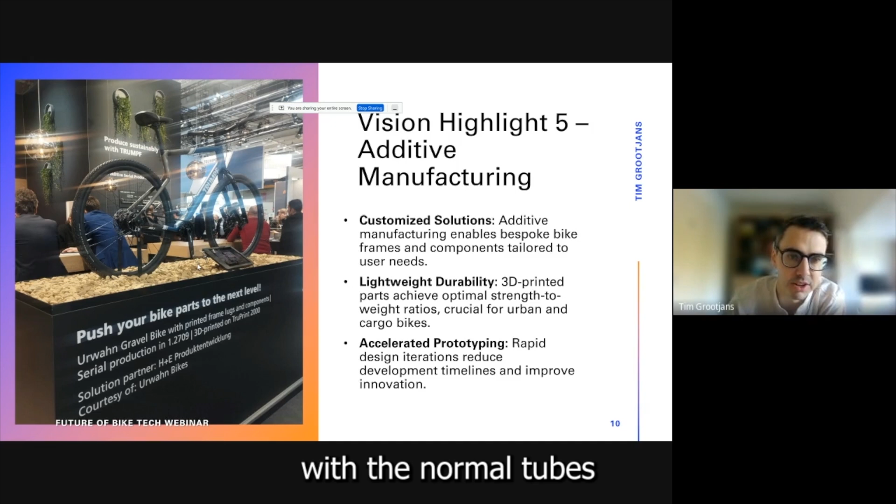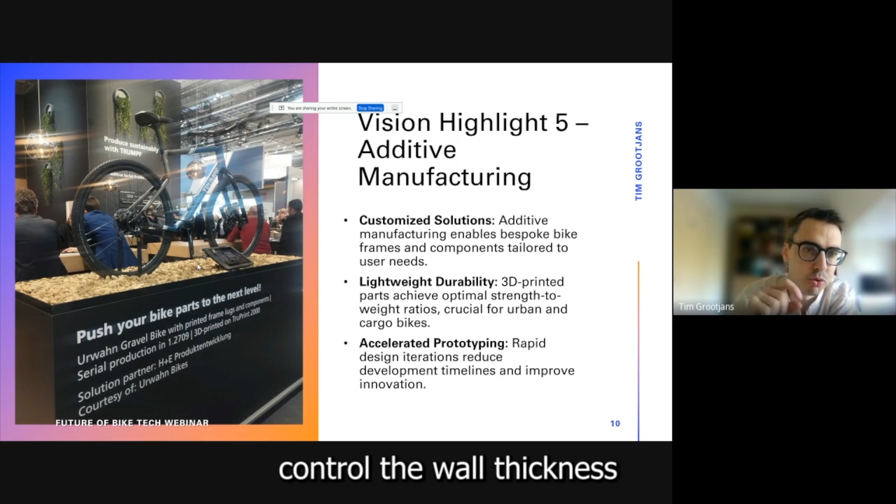So each bike had a different cover, which enabled us to customize it, for example with the rider's name or a different texture. This example was made by a company called TRUMPF or Urwahn, a German bicycle company, and they printed some of the lugs of this frame—parts welded together with other normal tubes. Doing this, they claim they can really precisely control the wall thickness and structure of each lug to save weight.

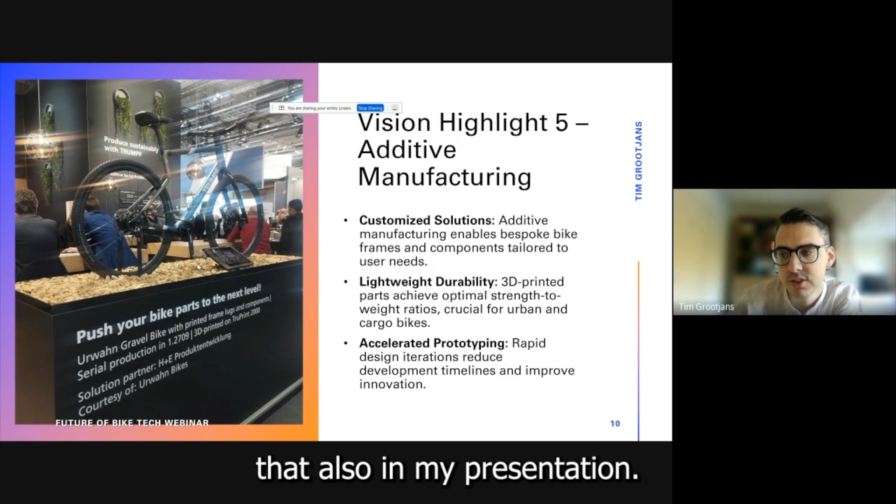So this is something that will be really interesting in the future, to see how this develops. And of course, lastly, like I said, we've made a lot of prototypes, which I showed in my presentation. This really speeds up the design process and helps with designing bicycles.

I was also on the panel there, and for me this is really interesting for the future—where every bike can be printed locally, cutting down on supply chain challenges while offering unparalleled customization. This is the same topic that Victor shared, about reshoring some of the manufacturing locally, which will offer more customization on the bike and shorter lead times on parts.

So this is where the future could be going, but nobody can really predict the future that well. I think we'll see a lot more talks and innovations about this in the near future. I hope the bicycle industry and its innovations continue—it's a really exciting industry to be in right now because it helps give people more accessible transportation.

It's very good for businesses too—even those using bicycles and cargo bikes can lower their operational costs. Cities are also investing in this. We're working, like Victor also said, with the European government and local Dutch government who are really interested in this industry, to make mobility more efficient and smarter.